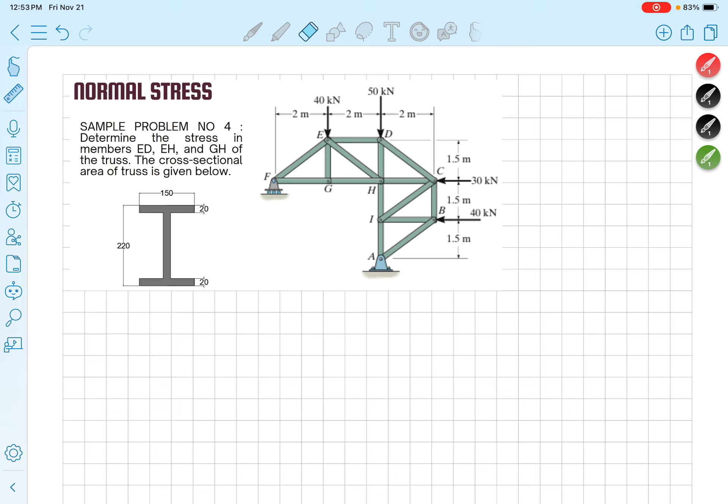The only difference is, of course, the stress we're discussing here. Most of what we're talking about here is all about stress. So if we recall, you all know that the formula for stress is sigma equals force over the area.

But let me recall that this area is not just the area. It is perpendicular to the force P. Let me do a quick sketch of how this happens.

For example, this is your body. And then, guys, you have force P acting on this side. So this is your force P.

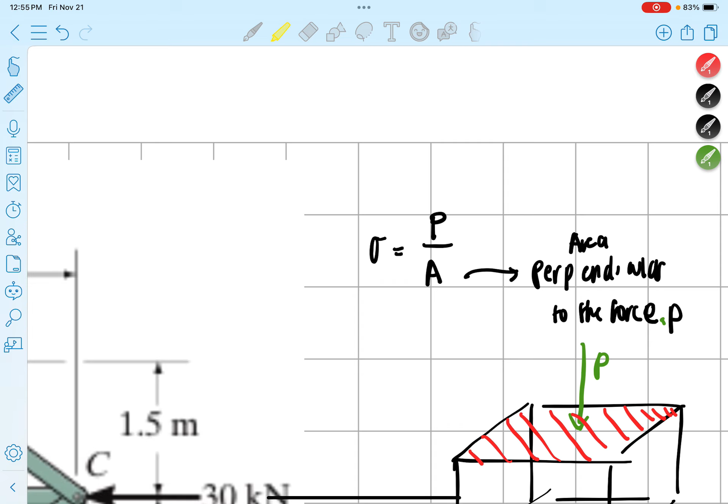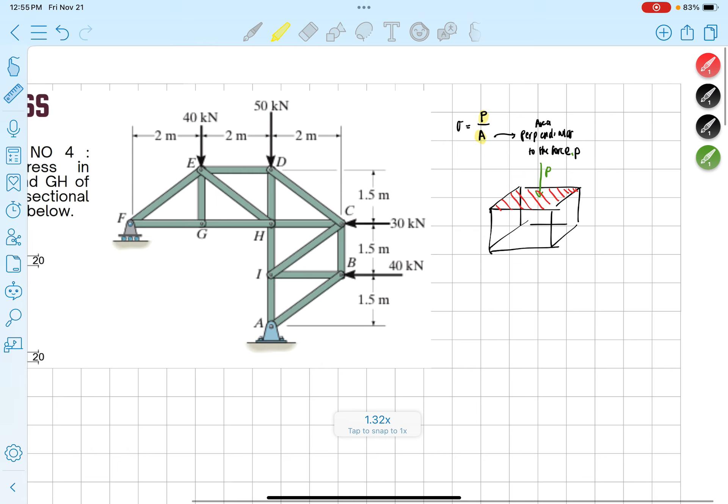The force, let's read the problem. It says: determine the stress in members ED, EH, and GH of the truss. The cross-sectional area of the truss is given below.

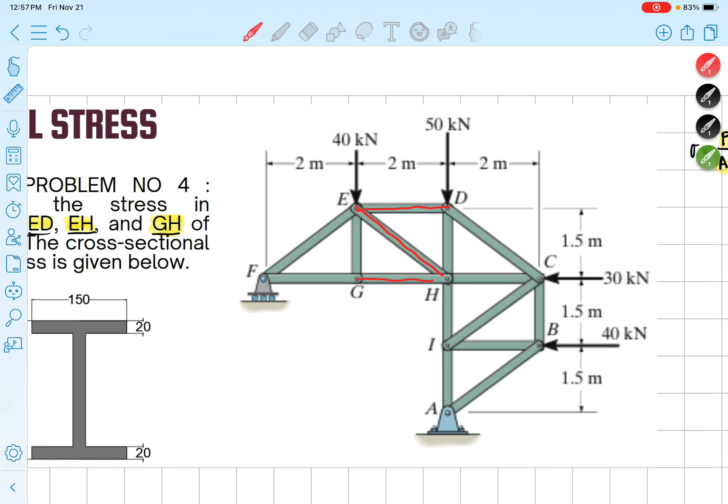When we cut the section, we can consider the right side or the other way around, the left side. My rule before in statics is that when doing method of sections, to get the fastest way to identify the internal force of each member, always choose the side with fewer forces and reactions. Why? Because aside from being faster to solve, it's also more prone to error if you consider more forces. So the less, the better.

If you look at the right side of our cut, we have 50 kilonewton, 30 kilonewton, 40 kilonewton, and we still need to get the reaction there, which is A. Whereas if we choose the left side, we only have 40 kilonewton, and of course the reaction force at F.

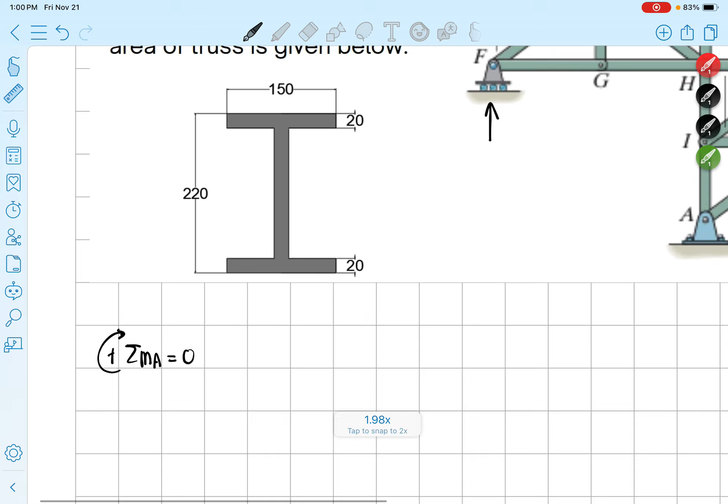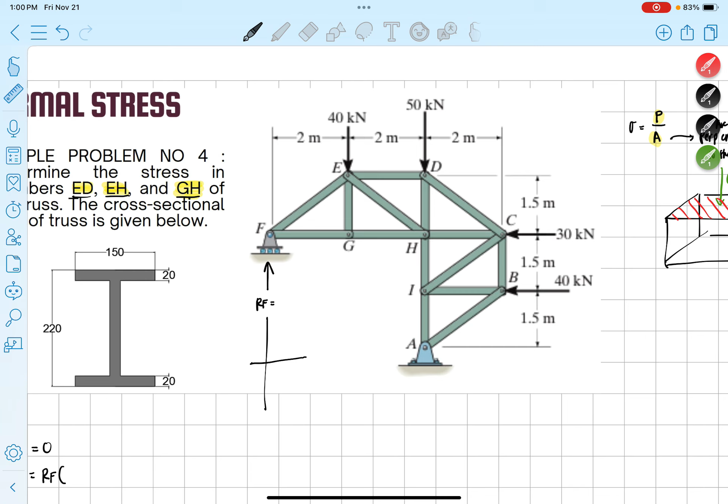RF multiplied by the moment arm - what's the perpendicular distance if you're coming from here? Isn't it 2 plus 2? That's the distance from the support where we're taking the moment. If you look at it, that's the perpendicular distance. So we're safe to say it's equal to 4.

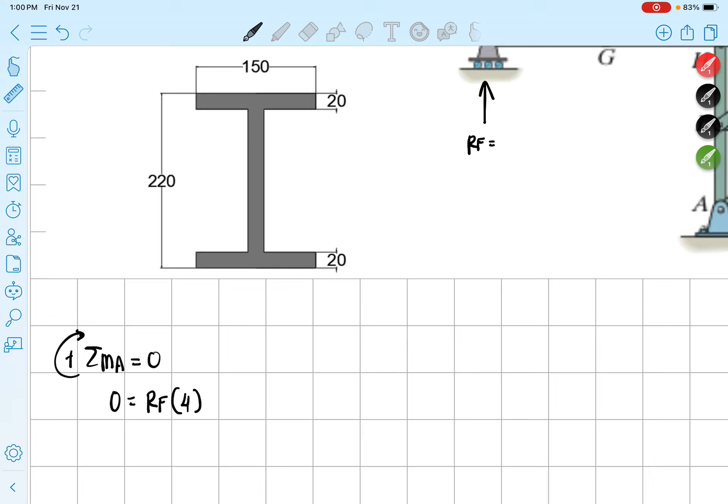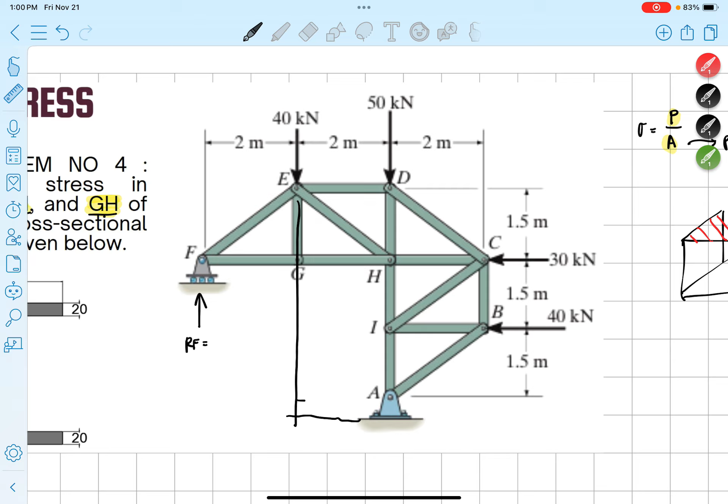Recall that, it'll be useful. And then next, we have the 40 kilonewton. I think we can use this 40 kilonewton. Now, using principle of transmissibility, if you move it directly here and take moment at A, the perpendicular distance is 2.

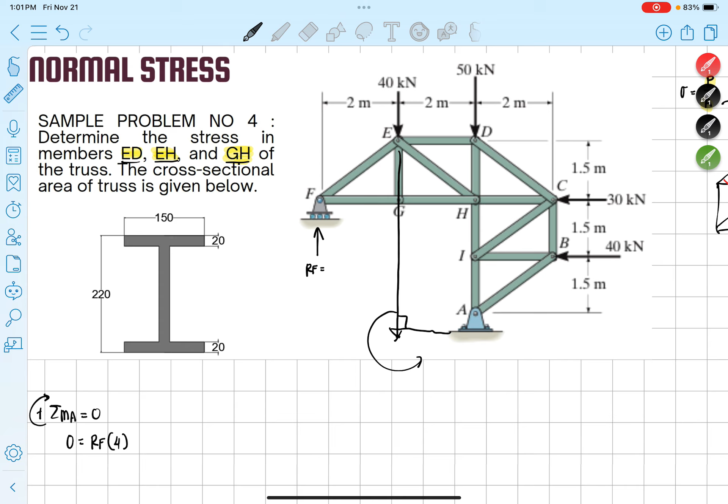Since it will rotate, how will it rotate? Using principle of transmissibility, it will rotate counterclockwise. So we're safe to say this is negative 40 multiplied by 2. Okay, that's two terms now.

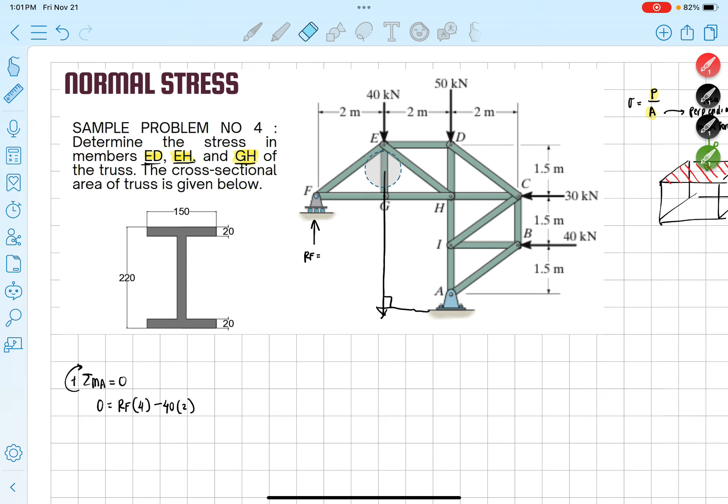Next is the 50 kilonewton. Does it have a perpendicular distance? Using principle of transmissibility, if you extend the line of action of that force, it passes through the point of consideration. Therefore it has no perpendicular distance. So if you want to write it, let's do plus 50 multiplied by 0 - it basically cancels out.

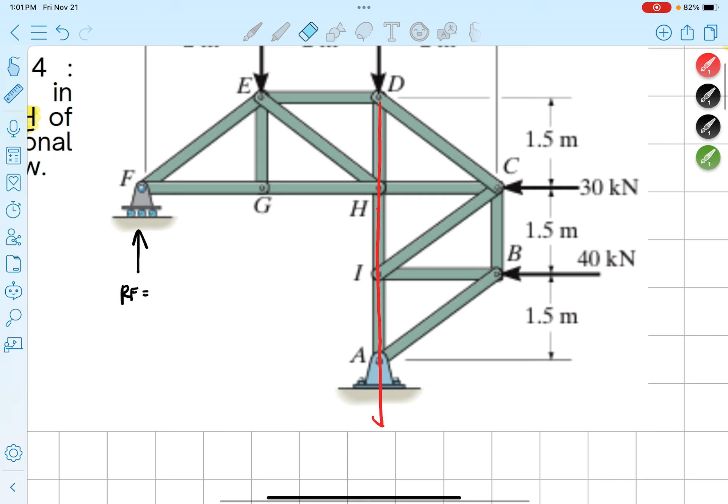Next is the last two, the 30 kilonewton and the 40 kilonewton. Let's identify them quickly. The 30 kilonewton rotates counterclockwise. So that's negative 30 multiplied by the perpendicular distance, which here is 1.5 plus 1.5, equal to 3.

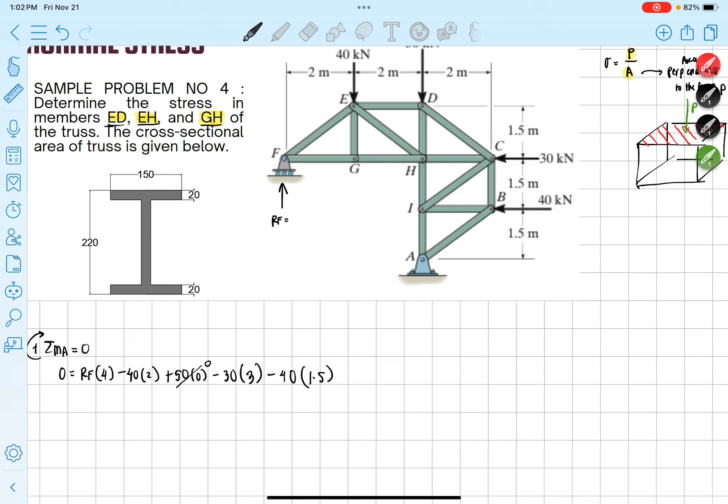For the last one, the 40 kilonewton rotates in the same direction as the 30 kilonewton. So this is negative 40 multiplied by its perpendicular distance, from here to there. So that's equal to 1.5.

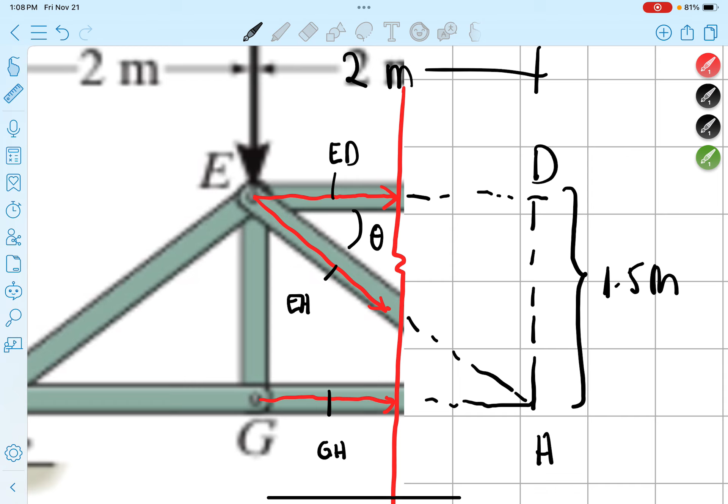Guys, supposedly hindi ko na dapat masyadong i-elaborate since may idea na kayo. However, wala akong magawa ngayon, okay. Yung pag-component na ganyan, so gawin ko na lang.

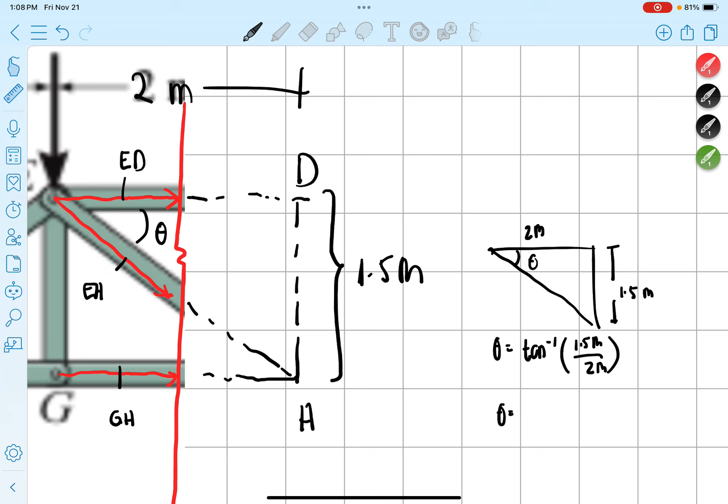So this is 2 meters and this is 1.5 meters. Pag tinake mo yung theta na ito, simply this is equal to arctangent of 1.5 over 2, arctangent ng 1.5 meter over the 2 meter. So ang theta natin is equal to 36.87 degrees. Wala namang kayo pag-argue, 36.87 muna gamitin.

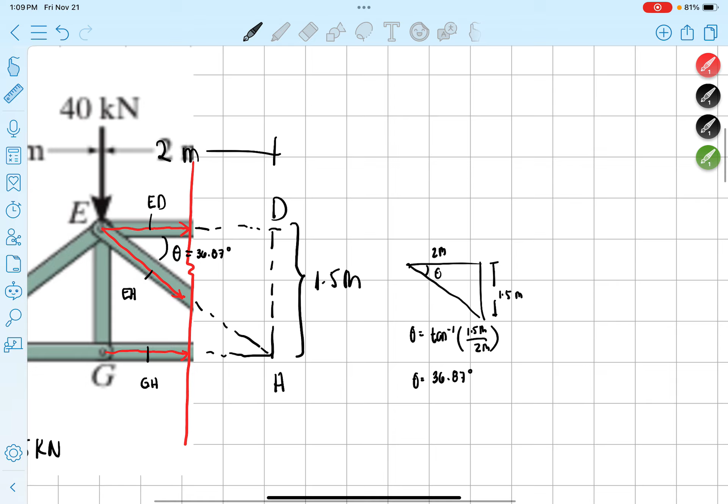Nagkakaintindihan ba tayo dyan, guys? Okay na siguro. Kung ganun pala, ang pipiliin ko dito, since ako naman ang masusunod ngayon, pipiliin ko tong member, or the joint E. Diyan ako mag-take ng moment, kung saan nagpapastor si ED, saka si EH. After that, okay, sabihin natin guys na, okay, clockwise positive. Summation ng moment at point E equal to 0.

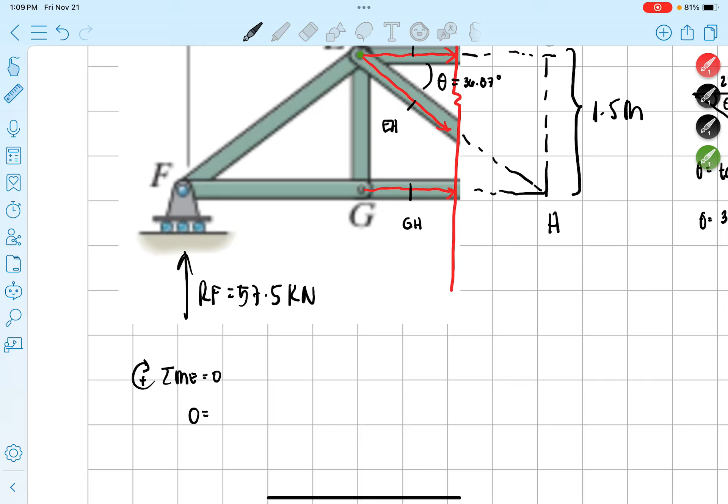So 0 is simply equal to, magagamit ba natin guys si reaction RF? Of course, okay. Pag dito ka nag-take ng moment sa point E, ang perpendicular distance mo from point E, di ba ganyan yan? Ayan, is 2 meters.

Ibig sabihin, yung 57.5 kilonewton natin, i-multiply natin by 2 meters. Nagkakaintindihan? Okay, ngayon guys, is it positive or negative? Kung titingnan mo, pag dito ka nag-take, ito yung RF mo pa rin yan, di ba? Principle of transmissibility, iikot yan as clockwise. So ang sign natin is positive.

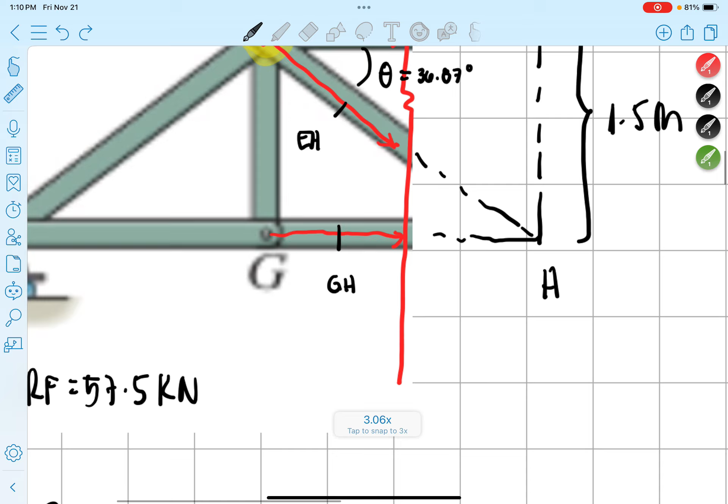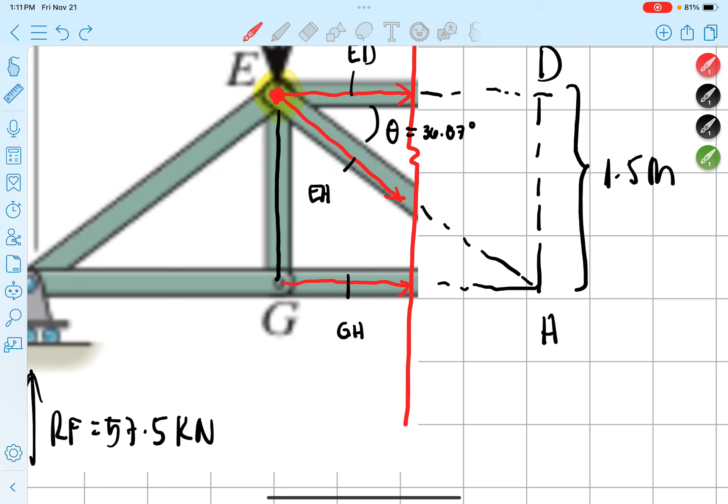Ngayon, ano pa yung kulang? Ito, of course, yung hinahanap natin. Kung titingnan mo mabuti, pag nag-take ka ng moment dito, ang perpendicular distance naman niya is ito, tama, so that's 1.5. Ngayon, paano siya iikot? Kung ito yung force, line of action ng force mo, pag ganyan, hindi ba iikot siya as counterclockwise? So if counterclockwise, clockwise yung assumption natin, is it safe to say that negative siya? Negative GH multiplied by, of course, yung sinabi ko sa inyo, ng moment arm, 1.5.

Makukuha na ba natin, guys, si member GH? Makukuha natin yan. 57.5 multiplied by 2, minus, ano pa? The GH multiplied by 1.5. So i-shift solve nyo lang. Lalitaw dyan yung 76.667 kilonewton tension. Okay, so yun na, meron na tayo. We have the 76.667 kilonewton tension.

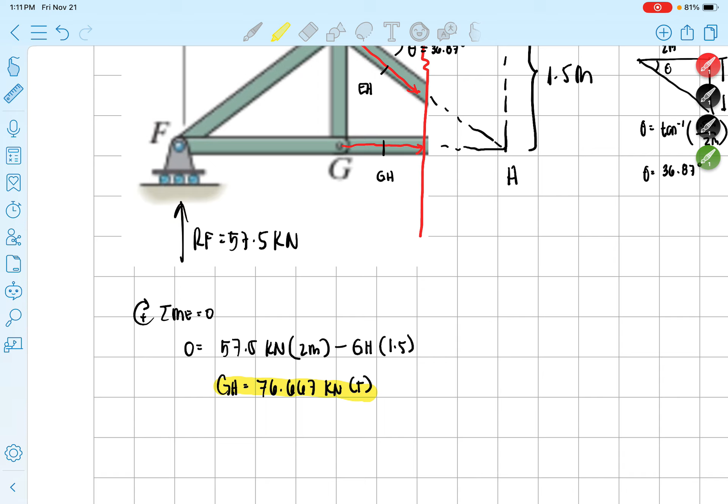Next one is the summation of forces vertical. Okay, so paano ba yun, sir? Pwede ba mag-take na lang ako, sir, ng moment sa H para mahanap ko naman yung ED? Okay, so pwede naman din yun. Tulad nga ng sabi ko sa inyo kanina, you have variety of options to choose sa pagkuha ng method of sections, but be mindful of the principle nga. Balikan yung principle ng method of sections para hindi kayo naliligaw. Pero tingin ko dito, since okay naman na tayo, I think summation forces vertical naman will do, kasi known naman na lahat.

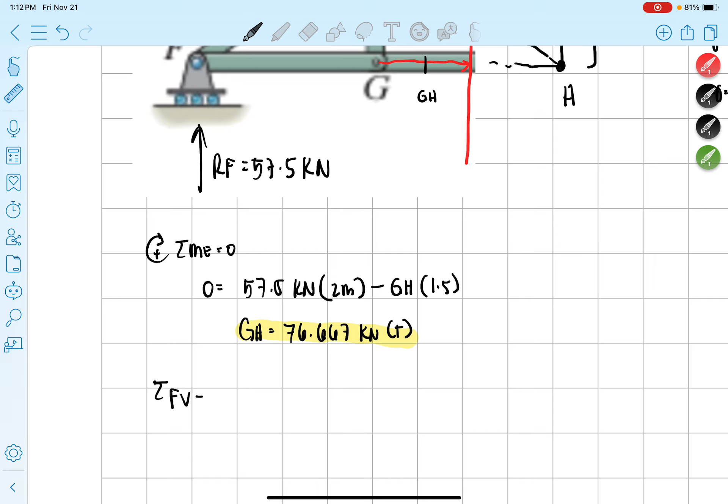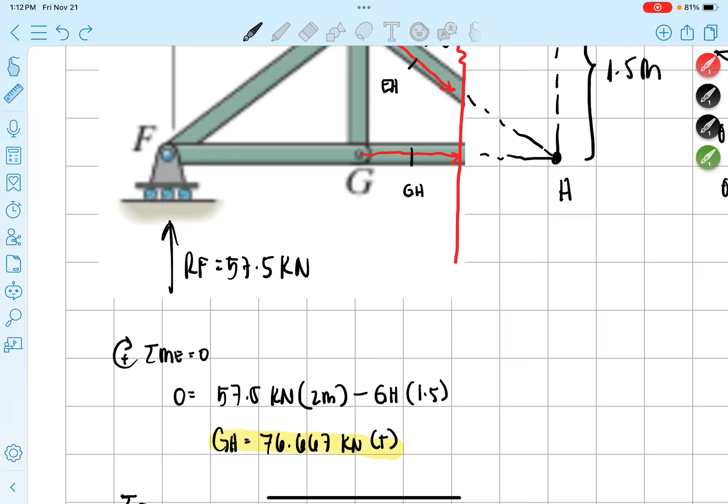Meron ka naman, guys, ibig sabihin pwede mo namang mahanap yon. Bakit? Kasi yung ED mo at yung GH mo is along the horizontal axis, ibig sabihin wala silang vertical component. Yung EH mo lang meron. Pero you have known naman itong vertical reaction mo, so ibig sabihin magkakaroon ka ng component doon. So kung ganun pala sir, summation of forces vertical is equal to 0, upward positive.

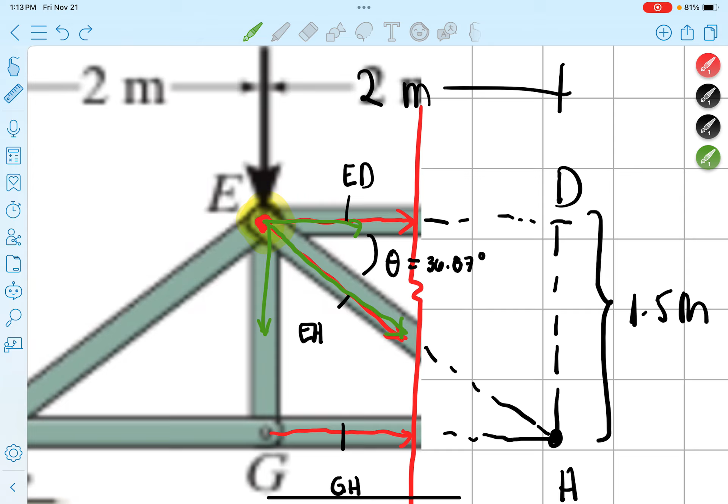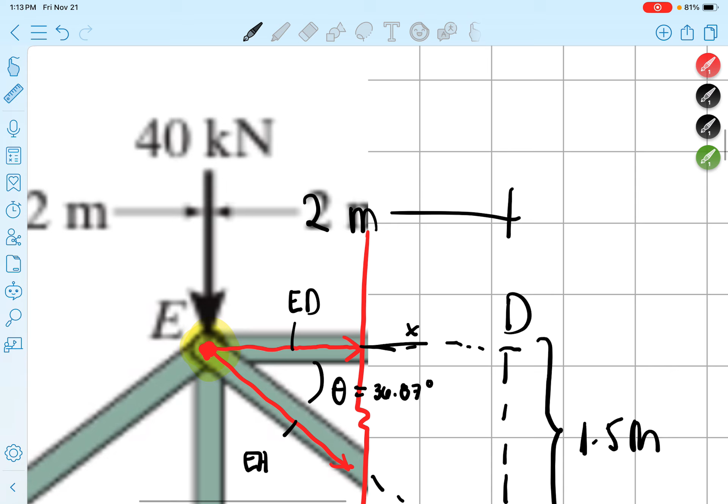So 0 is simply equal to 57.5 kilonewton, minus, kung titingnan nyo mabuti, kung ito kasi yan yung EH natin, di ba mahahati into two components yan, o by green, yung green dyan. Di ba yung EH natin na to, di ba mahati yan sa vertical tsaka sa horizontal component. So paano natin gagawin yun? Basically, gamitin mo lang yung angle. So para makuha mo yung vertical component, at yung reference ng angle mo ay nasa x-axis. So ibig sabihin, para makuha mo yung vertical component niyan, you have EH sine of 36.87.

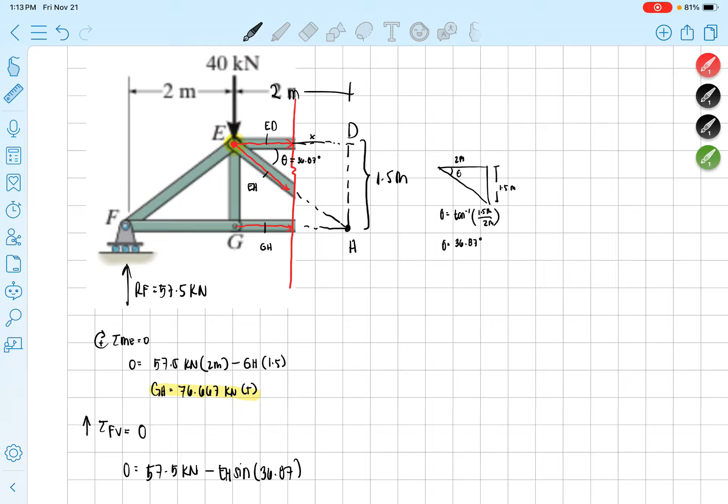So, makukuha na natin guys yung ating, meron pa pala tayong kulang, which is the 40 kilonewton. Sabi nga natin kanina, di ba? The forces na nasa left natin, kasi left yung kinonsider natin, lahat yun papasok. So, ibig sabihin, minus 40.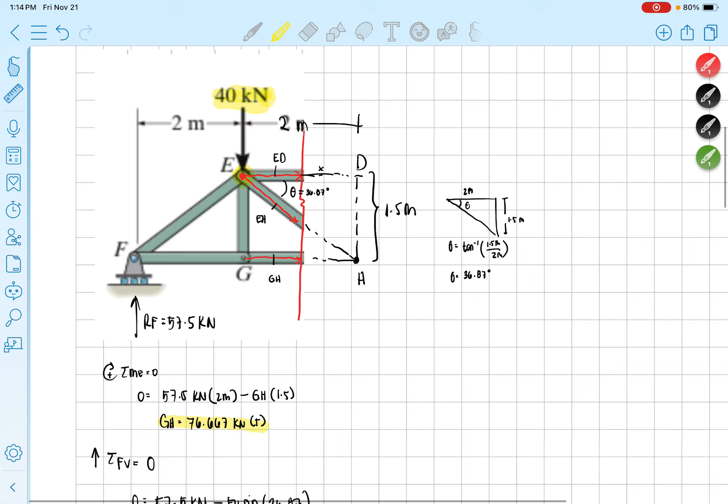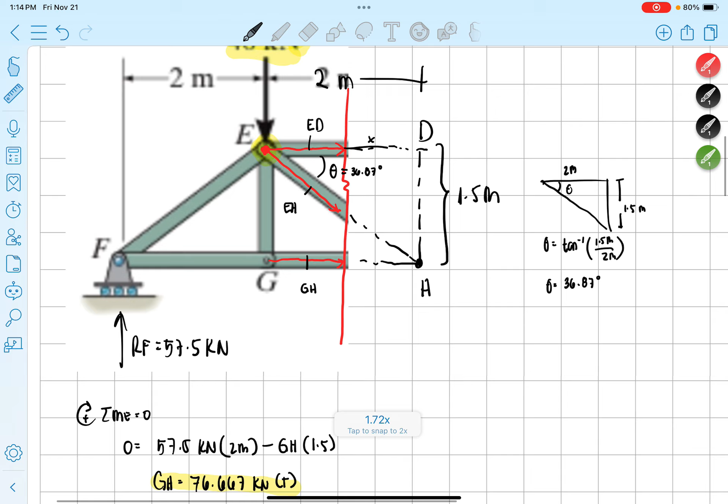Sir, bakit kanina hindi po pumasok, by the way? Hindi siya pumasok sa moment natin kanina. It is because nag-pass through din siya sa point E. Alam niyo naman yun guys, that if yung point in force mo is nag-pass through sa point na kino-consider, basically, walang moment doon. So kung ganun, hindi siya kasama sa moment, pero kasama siya sa summation of forces vertical.

So okay, minus of course 40. Pagka yan, so shift solve lang natin, 57.5 minus EH sine of 36.87 minus 40. Shift solve, makukuha natin yung member EH natin. We have, for member EH, we have 29.167 kilonewton. At again, tama yung assumption natin, tension din yan. Okay, that's the case, let's move forward.

Okay, last na tayo, last na force na tayo. So given na yung GH natin, given na rin yung EH, mahanap na ba natin yung ED? Actually yes, mahanap na natin. So summation ng forces horizontal na lang, mahanap na natin yan.

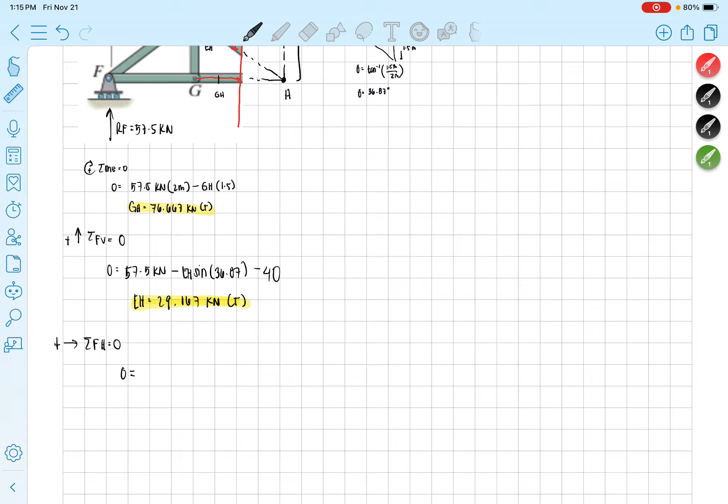Pakanan is positive, okay, ito positive, this is positive. Okay, so simply 0 is equal to GH. Ang GH natin, guys, ang GH natin is 76.667. Tignan mo buti, sabihin natin i-unknown ko muna. Sige, GH, kasi pakanan yung GH, plus ED, tama, minus EH, cosine of 36.87. Bakit nga cosine? Kasi nasa horizontal component na po tayo.

Okay, so yung GH natin is simply 76.667. Yung EH naman natin is 29.167. So makukuha naman natin yung ED. So makukuha na natin yan guys. So 0 is equal to 76.667 plus yung hinahanap natin plus ED minus 29.167 cosine of 36.87.

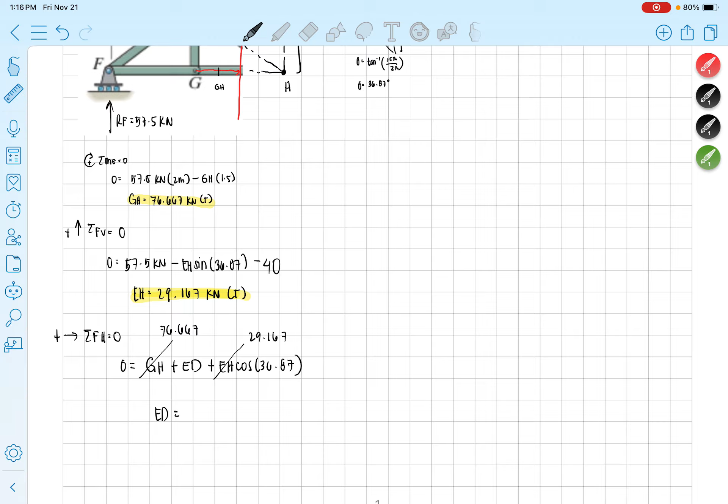Kapag na-shift solve tayo, we'll get, of course, 76.667. Sorry, this is plus pala, since ang assumption nga pala natin is lahat ay tension, lahat pakanan, yung pati component. So ang makukuha natin is negative 99.99. Ay, sabihin na natin 100. Okay, pag ganyan, safe to say na 100. Negative 100 kilonewton. Pero bakit po negative? Ibig sabihin, mali yung direction ng assumption natin for member ED. So to correct that, ED is simply 100 kilonewton compression.

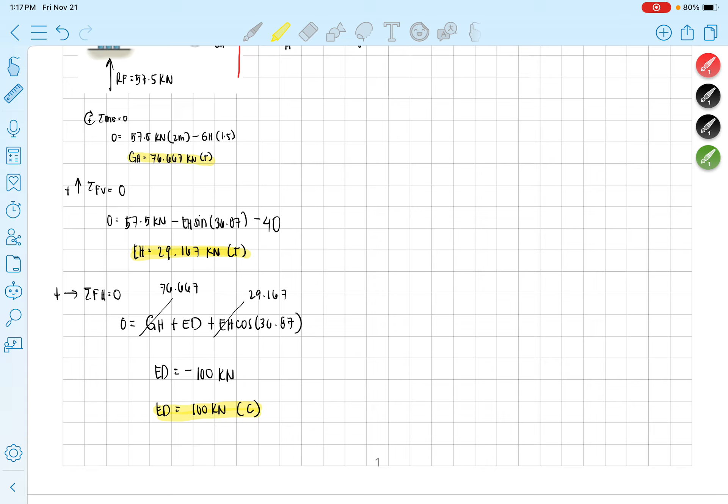So eto yun, bakit mahalaga sir na yan? Di ba nga guys, meron tayong dalawang type ng stress, either compression or tension. Pag tension, nahihila niya yung bakal. Pag compression, tinutulak niya yung bakal along the cross-section. Meron na tayong force, ang kailangan na lang natin is the area.

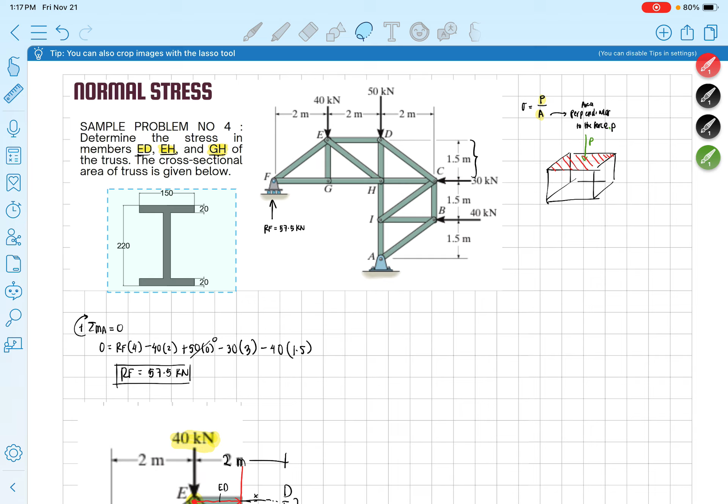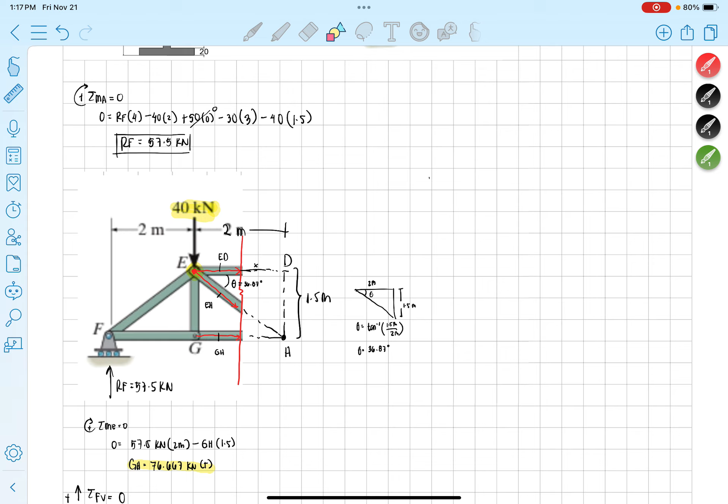Okay, ngayon i-extract ko lang to. Okay, siguro yung area computation is, by the way guys, yung area na nilagay natin dito, o area na nakalagay dito, is area yun para sa lahat ng cross-section ng bar. Okay, so ibig sabihin, para yun sa lahat ng member. So isang area lang ang i-consider natin para sa lahat ng member. Okay, ba tayo?

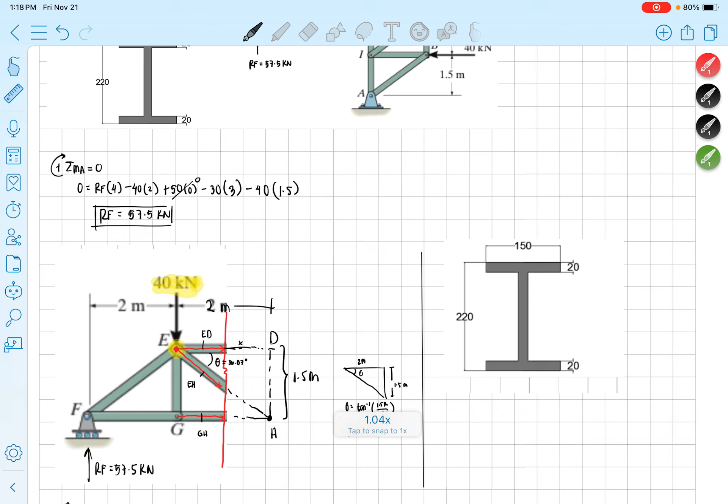Wait lang. Okay, so yan, area computation muna tayo. So next guys is yung area. Paano ba natin makukuha tong area? Okay, paano natin kukunin yung area?

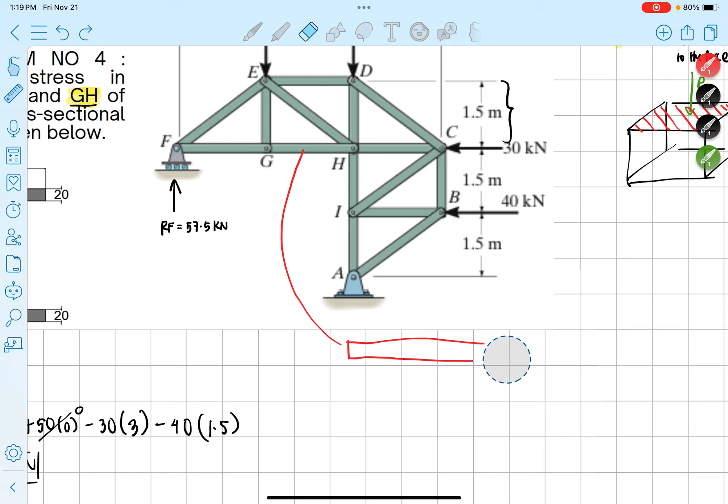At ang ibig sabihin pala nito guys, if titingnan nyo mabuti, pag for example the member GH, diba pag ganyan yan, okay, pag ganyan, bar siya, bar. Ngayon pag tiningnan mo ngayon yung ano yan, if iti-trade natin, di ba pag ganito? Tingnan nyo nga. Ang pangit, pero sana nagigets. Ibig sabihin, yung cross-section na to is yung wide flange natin, ayan yung pinaka-cross-section natin. So kung minakuha ka, pangit nga. Sorry, okay mamaya na, basta ang intindihin nyo lang guys, that pag pinutol natin to, ang itsura nyan, pag iniharap sa inyo, yung member GH is eto.

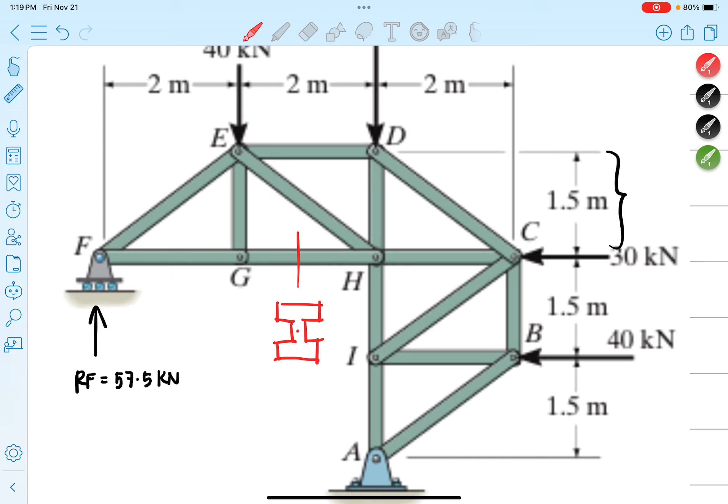Okay, at dyan nag-act yung inyong forces. Ayan, diyan sa may binilog ko sa gitna na yan, sa centroid nyan. Okay, so tanggalin muna natin, kumpitin na natin yung area. Okay, so ibig sabihin, yung mga internal force na nakuha natin ay nag-act mainly dito. Kasi symmetrical naman siya, andito naman yung kanyang centroid. Pero yun ba ang i-target natin? So hindi muna, area naman syempre.

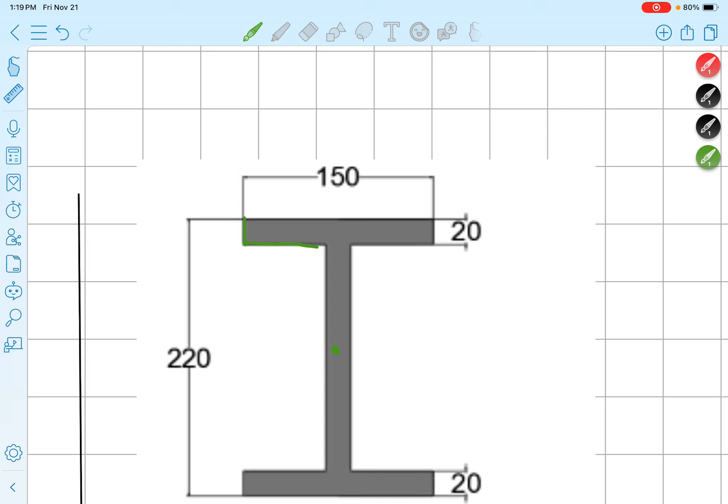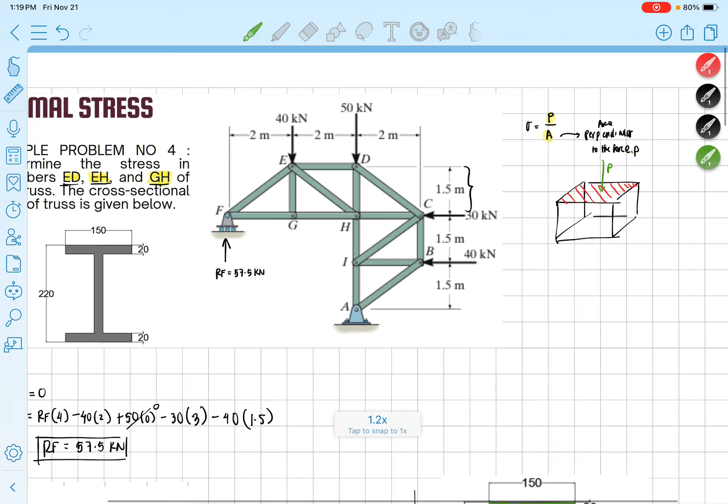Okay, so meron tayong given na area. Okay, pwede ko bang hatiin to sa tatlo na lang siguro? Tatlo, eto, and eto. By the way, yung dito, okay, ang tawag dito, yung natin, yung measurement natin dito is in millimeter. So unahin natin siguro itong nasa taas na to. Okay, and then same lang sila with this one.

Bago tayo magsimula ng computation, kunin muna natin itong gitna na 'to. Okay, so we have 220, minusan natin ng 20 sa baba, minusan din natin ng 20 sa taas. Tama? So this is 180. Paano yun? Pagka kinuha mo 'to, so this is 20, tama? Plus 180, plus 20 ulit, equal to 220. I hope maliwanag sa inyo yung part na yun. Okay, I hope tama ako.

Paki-double check na lang. So 40 times minus, 220 minus 40 is simply 180 nga. So bakit? Kasi hinati nga natin siya, sabihin may sarili siyang height ngayon. Ay, hindi ko pala nalagyan ng thickness. Paki-note na lang na yung thickness na 'to, hindi ko pala siya nalagyan, is 20 na lang din siguro. Or sabihin natin 10 na yan. 10 mm. So kung ganun pala, makukumpute na ba natin yung area?

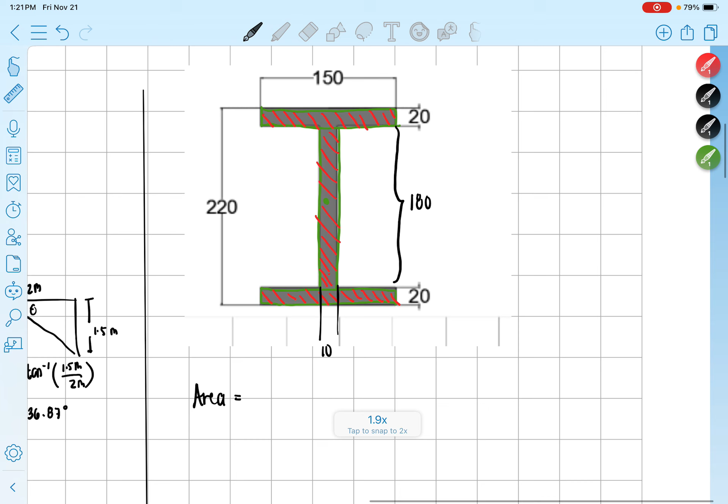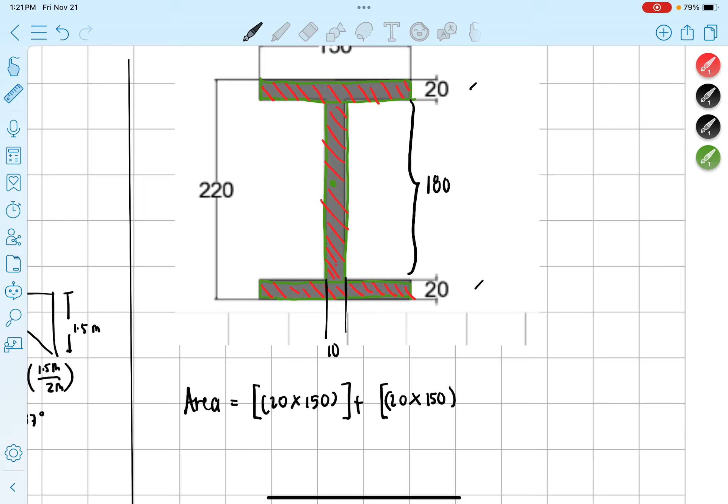So kumputin natin yung area. Kung kukumputin natin yung area, we have 20, sa una itong pinakataas, 20 times 150. Plus yung nasa baba, same lang, ito nasa baba naman, 20 times 150. And then for the last one, we have 180 multiplied by 10. So ilan yung area natin? Ang area natin for this one is simply 20 times 150 plus 20 times 150 plus 180 multiplied by 10. Kasi lahat naman yan, rectangle lang, di ba? So ang makukuha natin is 7,800

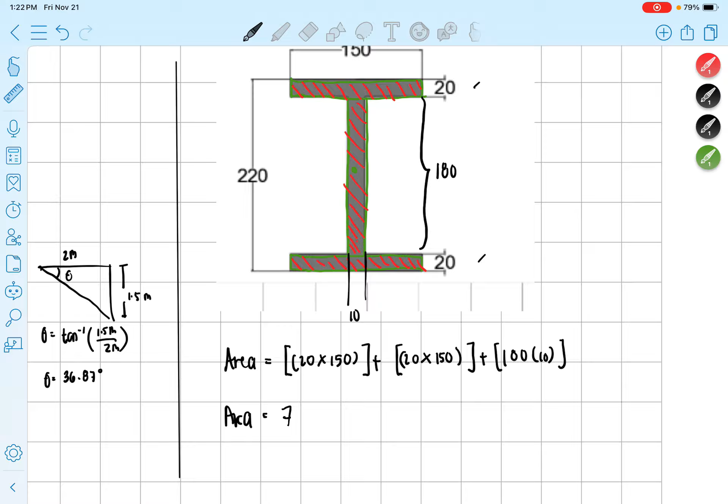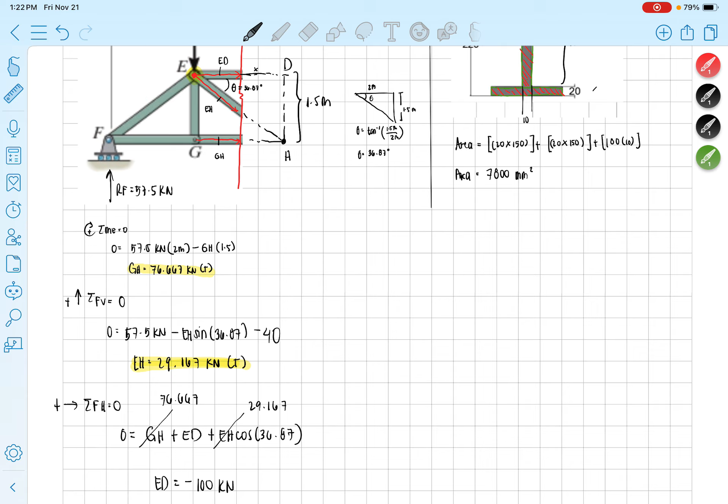millimeter square. So makukuha na ba natin guys yung stresses for GH, EH, and ED? So wala ako nilagay if MPa tayo or GPa o whatever. Pero MPa na lang siguro. Okay, for GH, di ba? For stress ng GH, simply equal to

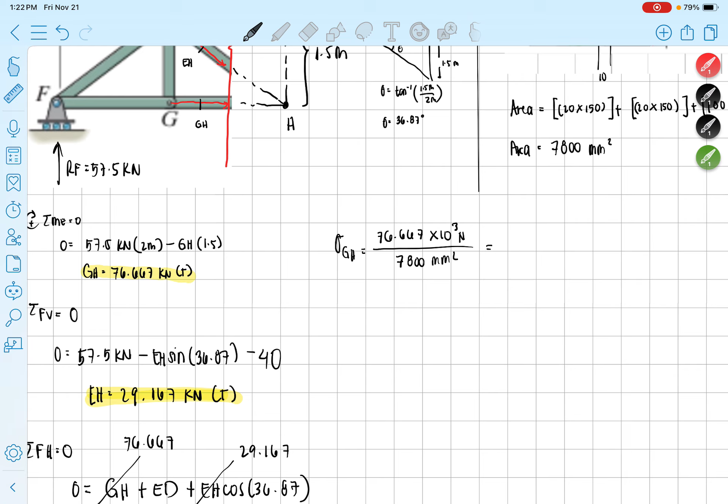76.667 times 10 raised to 3, kasi Newton per mm square ang kailangan natin, di ba? Newton over 7,800 mm square. Okay, this is equal to 76.667 times 10 raised to 3 divided by 7,800. So we have 9.829 megapascal tension. Okay, this is tension. So ayan ngayon yung ating final answer. Kakaintindihan? So ayan ang ating final answer for yung una.

The next one is the stress ng EH natin. This is equal to ilan? This is equal to 29.167 times 10 raised to 3, divided by 7,800 millimeters square. Sabi ko nga sa inyo kanina, same lang yung cross-section naman nila. So kadalasan kasi ganyan din naman yung mga problem. So pagka talaga, isa talaga pinakamahalaga is yung ating knowledge when it comes to solving the internal force. So 29.167 times 10 raised to 3 divided by 7,800, we have 3.739. 3.739 MPa, also tension. That's a case.

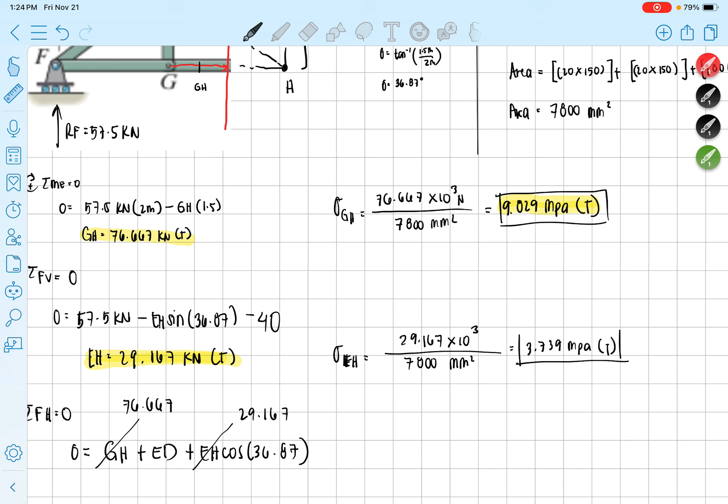Ito na ngayon yan, at isi-shade lang natin siya. And then down for the last one, we have stress at ED is equal to 100 times 10 raised to 3. So this is Newton pala. So Newton, okay, divided by 7,800 millimeters square is equal to 100 times 10 raised to 3 over 7,800. We have 12.821 MPa compression. Okay, and lumabas na may ads.

Bayad dyan na kasi sir, paldo kayo. Hindi ako paldo guys, sorry. Pasensya na kayo kung may ads.

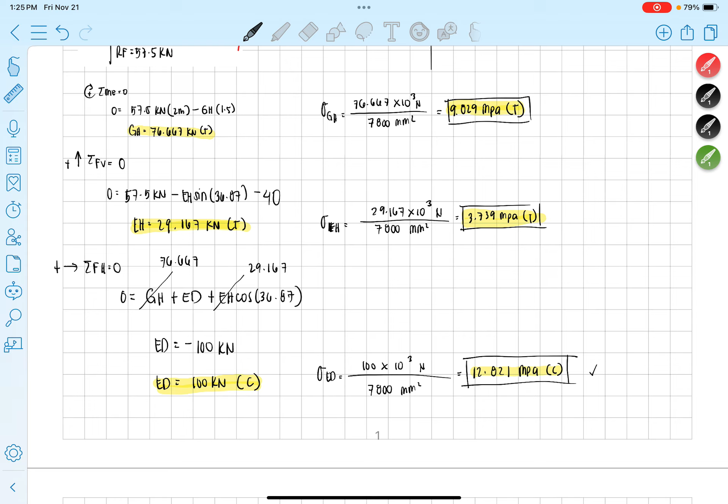Okay, so ayan na guys yung sagot natin. But ano yung implication na 'to? Ayoko kasi mayari yung sample problem natin na hindi nabibigay sa inyo yung halaga, kung paano yun nakuha. Mapapansin niyo guys na ang pinakamaselan dito is of course itong ED. Bakit? Kasi po compression, hindi ganun guys. Although tama na i-consider natin yun. Pero kung titingnan niyo mabuti yung magnitude ng stress, siya yung pinaka-stressed na member. Ibig sabihin, etong ED ba yun? ED. Ibig sabihin, etong member ED na 'to, yung nakaka-experience ng great stress natin.

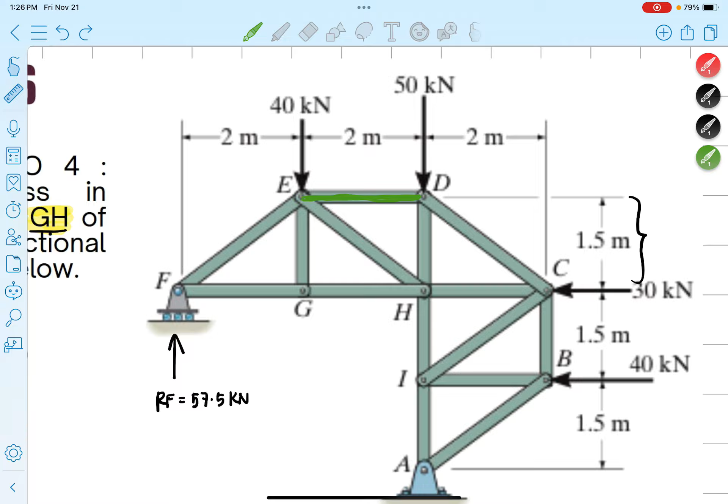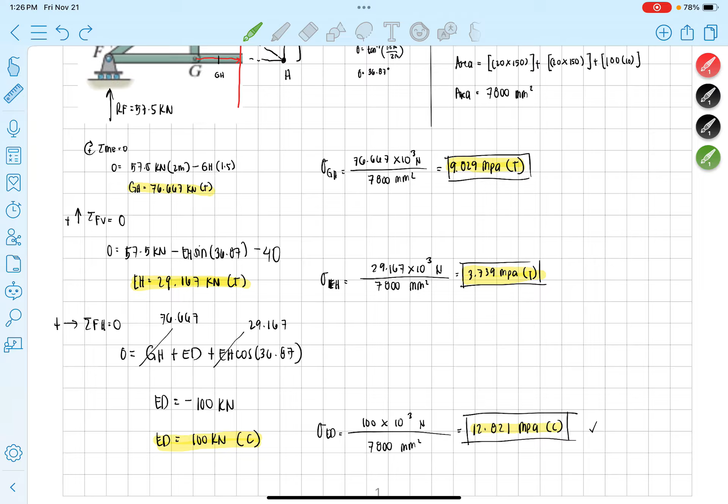Okay, so ibig sabihin, pagka nagdagdag ka ng mga additional loadings dyan, kailangan mo i-consider yan. Kasi pag na-exceed niya yan, kapag nag-exceed ka sa strength ng material na 'to, alam mo na kung alin yung pinakaunang pipitik, ayan yung pinakaunang masisira. So ibig sabihin, mahalaga na inaalam natin kung ano ba yung member na pinaka-stress para alam natin kung pwede nating baguhin yung material doon. Baka much better kung sa portion na yun, ganito yung kakargahin niya. Siya yung pinaka-stressed. Baka imbis na ganito yung bakal yung gamitin, baka much better kung S-class na bakal tayo. Baka much better kung mas magandang bakal yung kukunin natin. So ganun lang guys, yun yung additional sample problem ko for the normal stress.